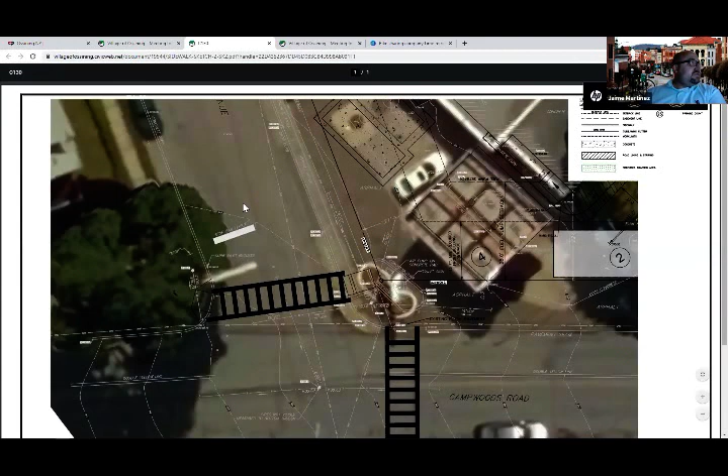So it's an L-shaped crosswalk that ends not too far from where the mailbox is on the opposite side of Campwoods — I'm probably not describing that very well. I'm going to pull it up and it'll make a little more sense. So, not that one.

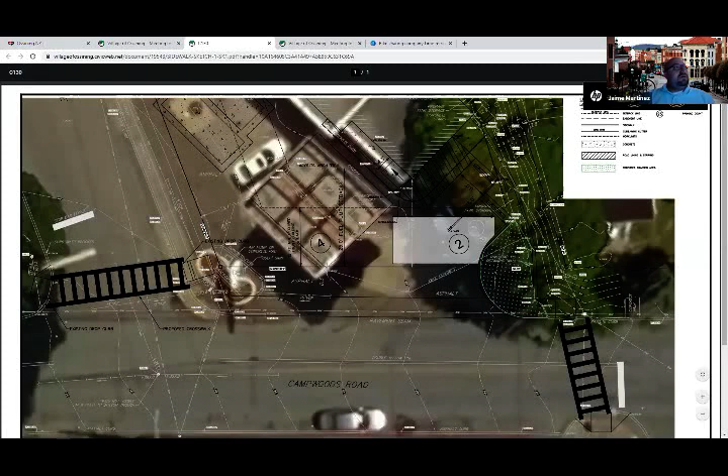Jaime, would there be any way that I could share my screen? Yeah. There we go, go ahead. Sure.

So this is what the idea was. Right, that looks right. Yes, I think we all like this. And after the board meeting, I ran this by Paul Fraioli just to get his blessing, and he was comfortable with this layout also. That's great.

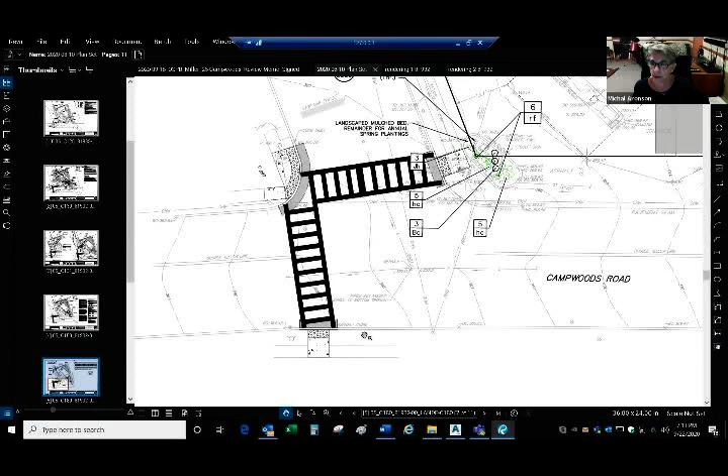Are there any other outstanding items that board members wanted addressed? I don't think so, but I just want to confirm we aren't leaving anything else out that we were concerned about. I just want to say thank you for those additional renderings that show the building with the canopy. That's it, I appreciate it.

Is there anybody from the public here to speak on this, Jaime? Let me check. There is no one from the public, and if you give me a second, I will check my emails.

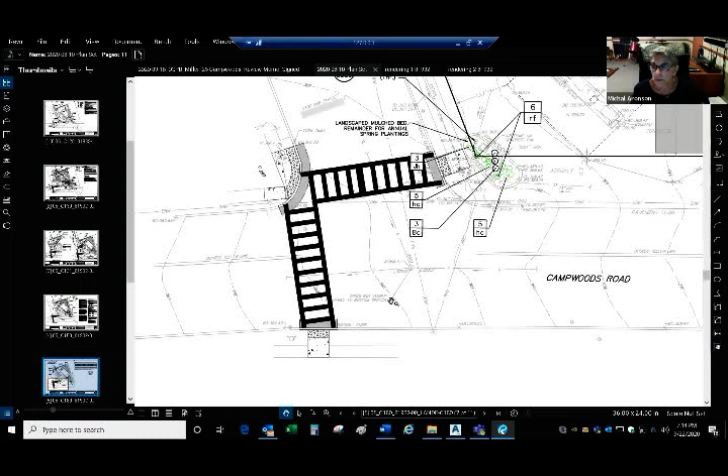You want to turn off the share function? Kyle? Yeah, there are no comments via email either.

Okay, so given what Brian had said, what are our options here in terms of board approvals? I believe it would be acceptable, but you also have to do BAR here. For the site plan approval, you'd need a condition that they complete a license agreement satisfactory to Corp Counsel. The Kellard Sessions memo says improvements in the right-of-way will be coordinated to the satisfaction of the village engineer.

I believe there was a change to the plans needed about the ADA parking space. It was almost a typo, one number had a change, but I think these can all be conditional. So you can.

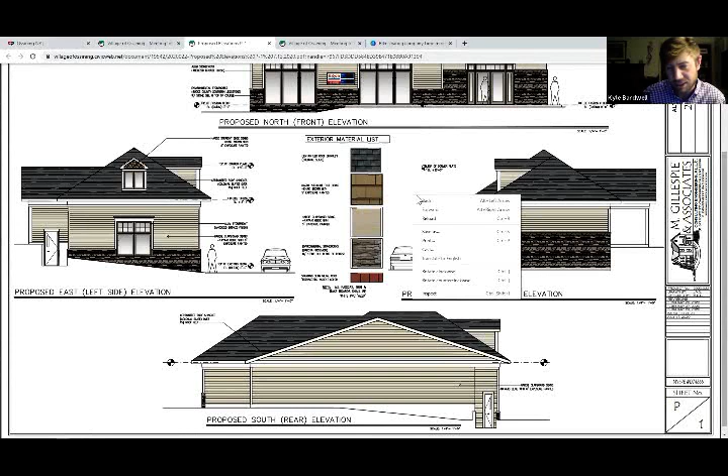So we tried to give basically HD photos from what the supplier would do. In the middle of the screen is basically all the products that we're supplying, and you can see them on the elevations, and they should be called out as such. Yeah, they are right here.

I'll read them off. There's the CertainTeed roof shingles, which are colonial slate. There's Hardie straight edge siding, khaki brown with 5-inch exposure, painted. There's Hardie clapboard siding using Navajo beige with a 5-inch exposure, painted. And then there'll be Environmental Stoneworks Dakota Pro Stack stone sill, with the stone sill at the top of the course.

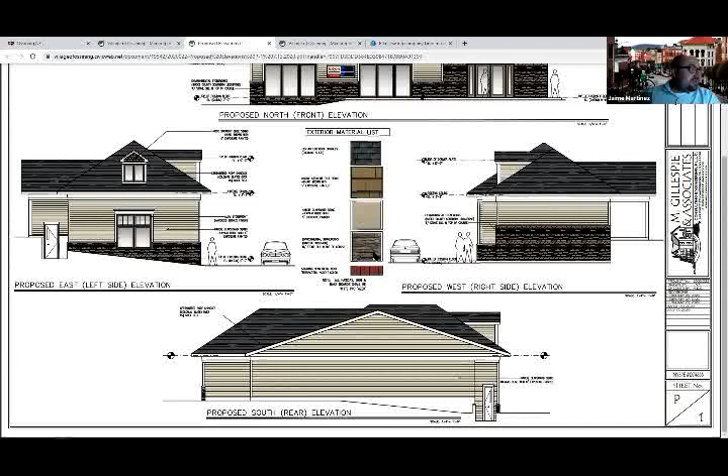Jaime presents it better anyway, so I'll let him. And there's a standing seam metal roof with terracotta accent color in front of the building. So right here, that's the terracotta roof.

Again, here's that little stone. At the top of the stone, there'll be a sill, like a stone sill. The Navajo beige right here, and then the Hardie straight edge siding up here at the top by these little window gables, and of course the roof shingles. So.

I know we talked about lighting on the site, and they were going to keep the lighting sort of low, downward washing. Any kind of lighting on the building? I don't see any fixtures there, unless I'm missing it.

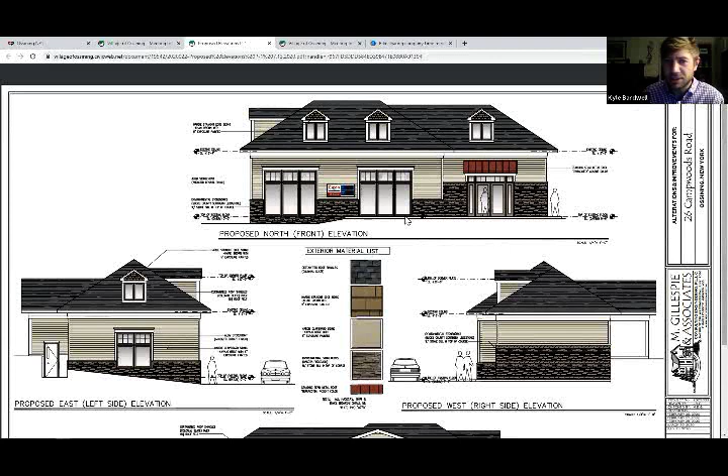Yeah, normally we engineer a photometric plan, and sometimes it doesn't jive with the architectural. So we did provide a photometric plan with our lighting fixtures as well. That's on sheet 190, and they're an architectural-style sconce light, so I can share my screen if you would like, Jaime.

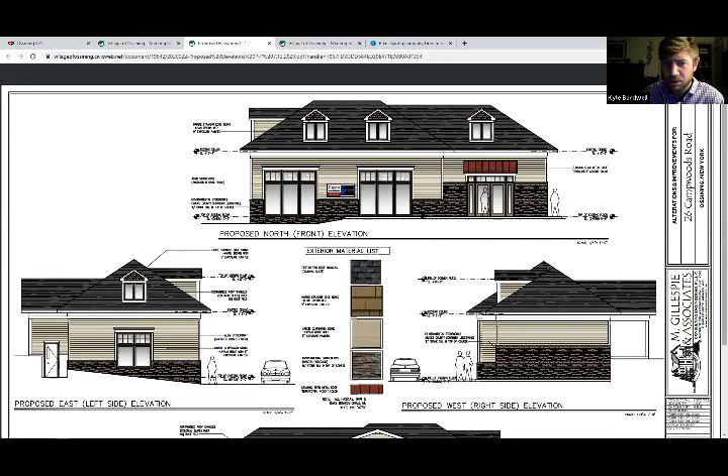To show you what that fixture would look like. Yeah, you can go ahead. Let me stop sharing. You want to share? Okay. So this is a look at the wall-mounted light. It's about 2 feet wide, 1.5 feet in height. It's architectural. It's nice.

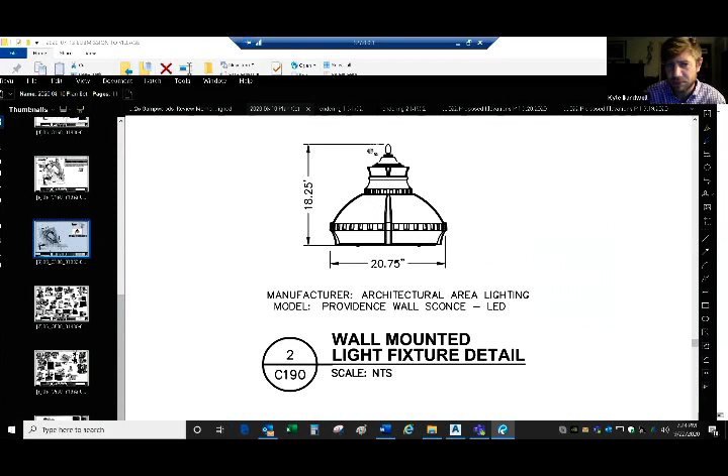And so we're proposing, I'll show you exactly where we're proposing one in the building as well. There'll be one in the front here, one on the side, one in the front here, and one on the side. This would be to best light up these parking spaces on both sides of the property, as well as making sure not to put any light over the property line.

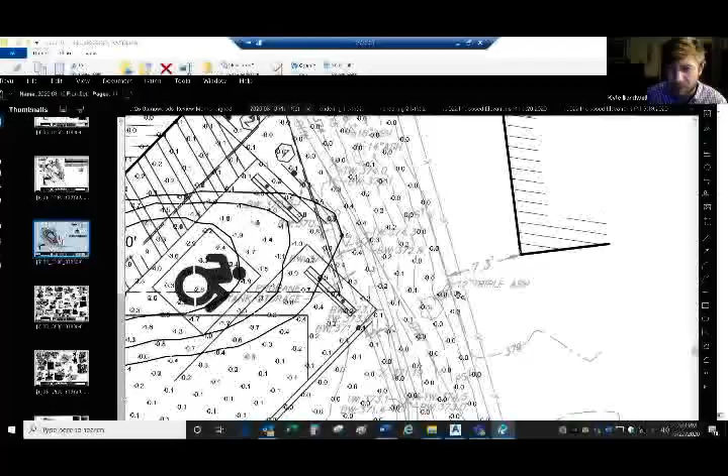So that's kind of why we went with these wall-mounted fixtures, aiming down. Is there a bollard light in the original plan? I remember maybe on the north side. Yeah.

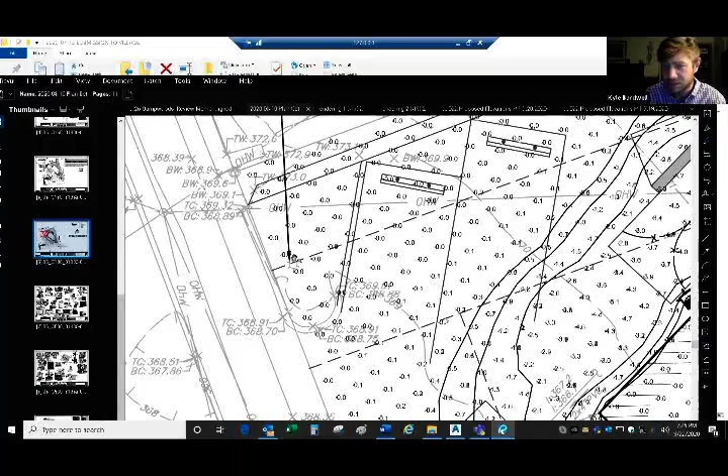Right, so there's one existing kind of bollard light. I think it's like a tall bollard that's existing out there. So we're just going to keep that in place, and that'll help light up this corner of the property without adding more light over there. Basically, the idea is we just put it over here to kind of light up the refuse and small part of this parking, and then this would be sufficient to light up the remaining parking area over here, as it does in kind of the existing condition.

So these are 4 proposed lights on the site. And then the lighting underneath the canopy for the fuel tanks, is that just the standard whatever's there now, or something different? That's correct. Yeah, so there's no changes to the canopy other than we're just changing the logo with the supply. Okay, the gas. So.

Okay, are you making sure that the canopy light also stays within the property line and not going out to the neighbors?

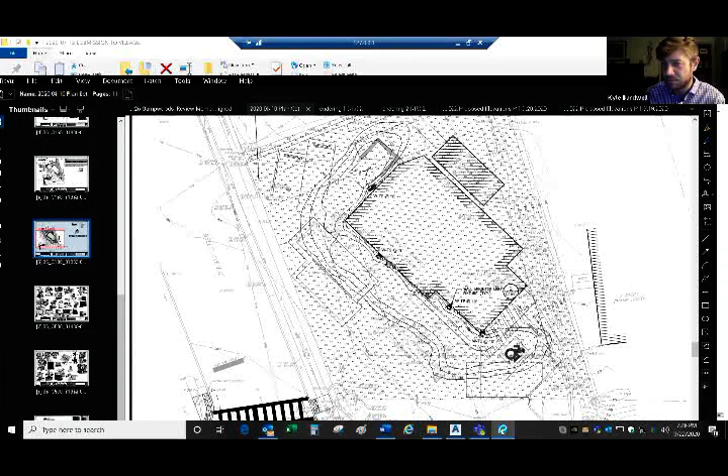So, kind of in line with what I was just saying, the canopy, we're actually not proposing any changes to the lighting, to the height of it, to the size of it. So we're understanding that it would basically fit the lighting that's out there right now, and I'm not aware of any concerns with it being too light at any point in the day. But we did, when we did our proposed 4 lights here, we did take a good look at making sure there was no spillover of light, and we're aiming our fixtures down and such to prevent that.

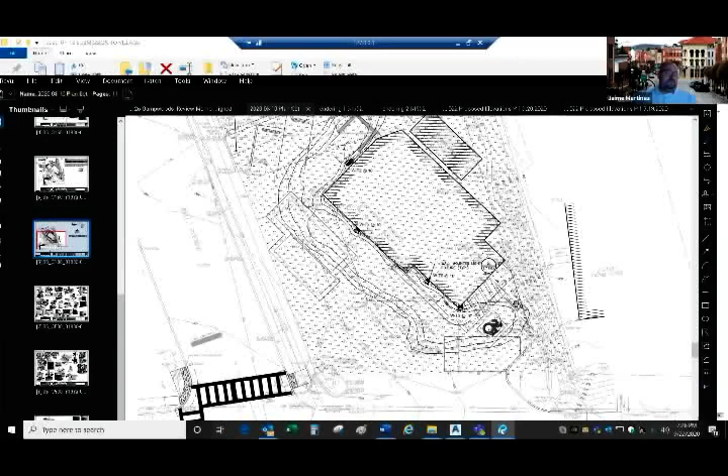I'm just trying to figure out from the elevations here, the standing seam metal roof, does that project out from the building, the one over the main door? So, let's see.

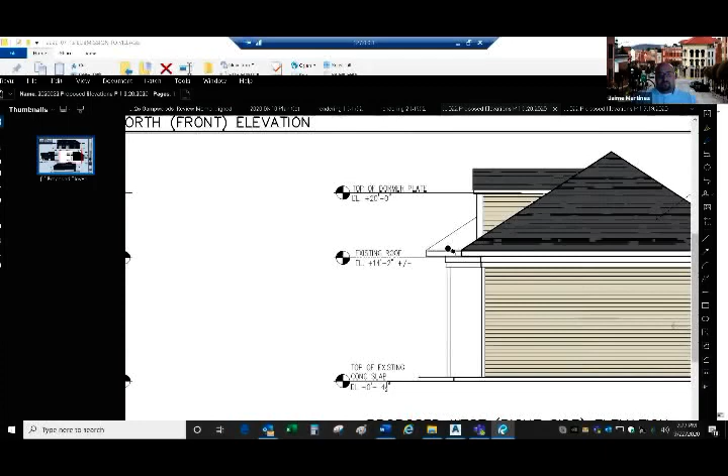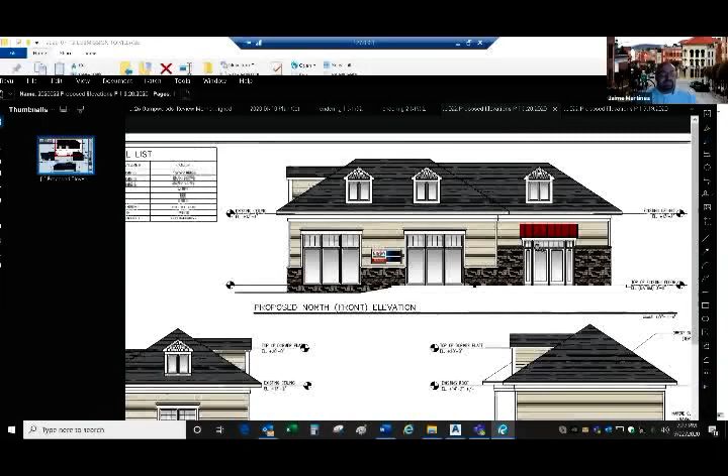I believe it would. Let me take a look at it here. This is, I believe, that roof you're discussing. Looking at my screen right now, is this what you're talking about, or is this the red roof? The red roof, like the terrace. Does that project out from the building above the door there?

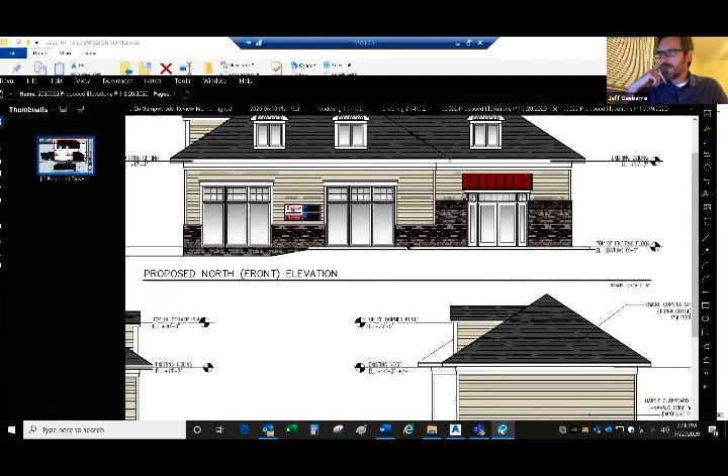I believe it does. I would have to follow up with the architect just to confirm the distance and exactly how much it does bump out. But I assume it would probably be a couple feet out, just because of the way it appears on those new renderings you did. And I know those are not always architecturally precise, but it shows it as sort of flat there.

Right, that's a good point. So yeah, I would have to follow up with the architect on that, Jeff, to see if it comes out a little bit. But I assume it does. I think that was just a mistake in the rendering creation.

Yeah, I think we're gonna need to be accurate with the elements, because that's basically what the department's going to have to review and enforce when it comes to building permit, CO, that sort of thing.

Sure. Yeah, we were hoping the renderings would kind of just give an idea of what it would look like in this area of the neighborhood, a little better look at the overall structure of it. But the architect is definitely more accurate and precise when it comes to colors and design.

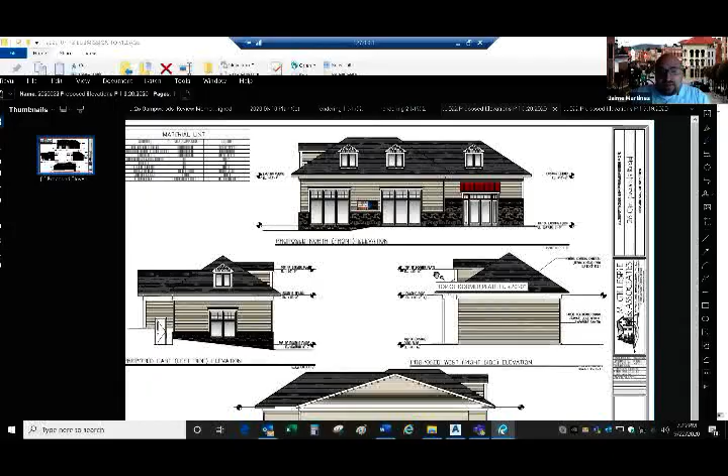Any other questions from the board? Just real quick, I guess the question I would have for you, Jeff, and the whole board is, if it's not flat and it does project, do you want to sort of set an expectation now, or is this the kind of issue we would ask them to come back for?

Yeah, it seems that, first of all, it's also labeled roof, so I think it should project unless there's some sort of reason, because of clearance, that it can't. I think it actually looks very nice. I think it adds to it, it's a nice feature that draws your eye to the entrance.

So I don't know, that's the only thing that sort of stands out to me, but I don't know if there's a way we can move it forward without having certainty as to that.

Is there an architectural plan in the set that would show that entrance door? No, this is actually the only sheet we have for elevation. That's all we got. And yeah, I'm under the assumption that it does project, but I can't be certain, to be honest with you guys.

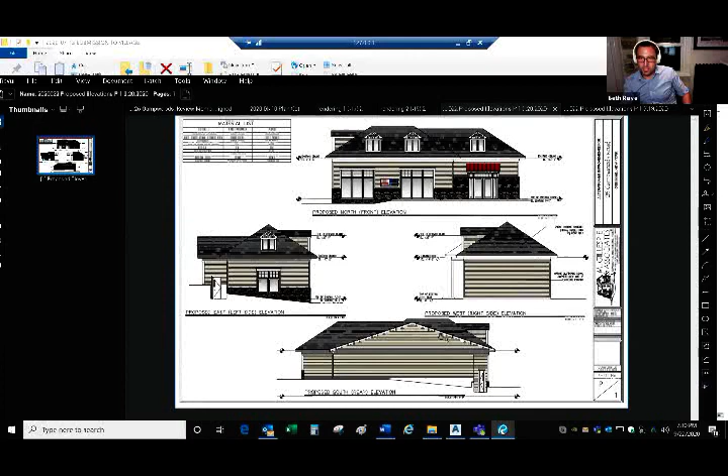So it's a roof, it should show on that west elevation. We should see it kind of in that white rectangle there, jutting out in that space. Yeah, where your cursor is. Yeah, that's what I was wondering. Not up there, it's actually lower, because it's below that fascia there.

Yeah, okay, so then as far as I'm looking at it, we're not showing it there. So what are our options here?

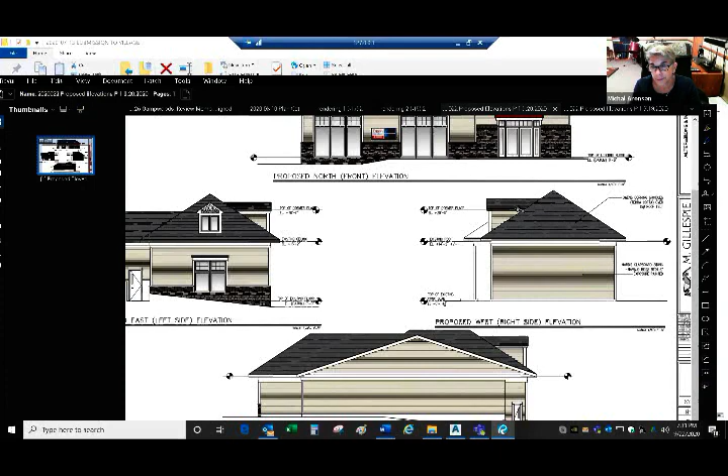Well, it depends, I guess. Is this kind of a material issue for the board? Do you feel that you want... How do the other members feel?

I think the design intent is clear on the north elevation that this is some sort of a bay entrance that projects out, and it's got a sloped roof. I just wish it was clear on the other drawings. Right.

I would keep in mind that there's still work to be done on this application to get an approval by the village. That's not going to take place until October. Even if they did get that, it would allow them to start work, but wouldn't necessarily, if this decision did get made till October, I don't know that would materially affect the project. They have one approval today.

So if you are concerned about this, I have a little bit of concern too, because I'm curious how this is going to get handled by the building department when it comes in, because they may look at this and say, I'm not really sure what's correct here.

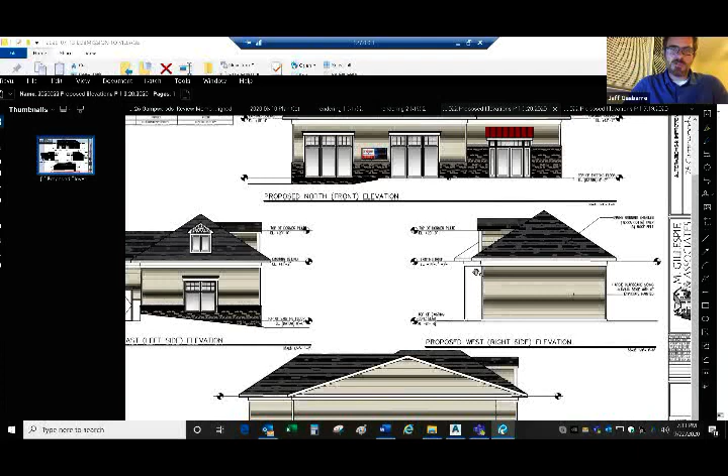It seems like it might make more sense to just hold off, in as much as it's not going to hold it back, and it would allow the applicant the opportunity to bring the architect here and better refine or explain what's going on, if that's necessary. It's just a clarification on this one element, because I feel pretty comfortable with everything else from a BAR perspective. If the rest of the board feels the same way, maybe we can get clarification next meeting.

I'll get a little more detail for you guys next time. Apologize about that. A suggestion - if the architect were here tonight, he probably could have given us a sense of comfort, and we might have been able to move ahead.

You basically have approval, so you can move ahead with the site plan, and you'll be back in October for basically this one little review of this one extended roof. So we could probably do BAR next month. Like Jeff said, this is really the only issue I think with the overall elevations.

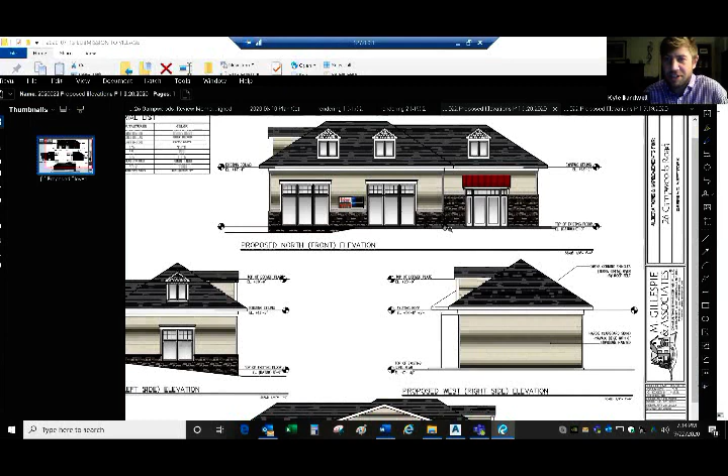I understand completely. I just didn't want to say something with utter certainty that I'm not certain about. I think that's the right decision usually - it's a smart move there. The first thing I'll do tomorrow is talk to the architect and figure out exactly what's going on with that front entrance, and I'll get that back over to the board.

So then Michael, you would just move to adjourn the BAR application, or take a motion to adjourn. Could somebody put forth a motion to adjourn the BAR to October? This is Jeff. Motion. Oh, Seth, you have it? Seth Roy, motion to adjourn to October just to deal with the entrance design.

Jeff, I second. Okay, and the roll call: Michael Aronson - aye. Mike Baldati - aye. Jeff Gasparo - aye. David Chow - aye. Alberto Fernandez - aye. Did I say Seth Roy already? I don't think so - aye. And Eric Talbot - aye. All right, that was 7 in favor, none against.

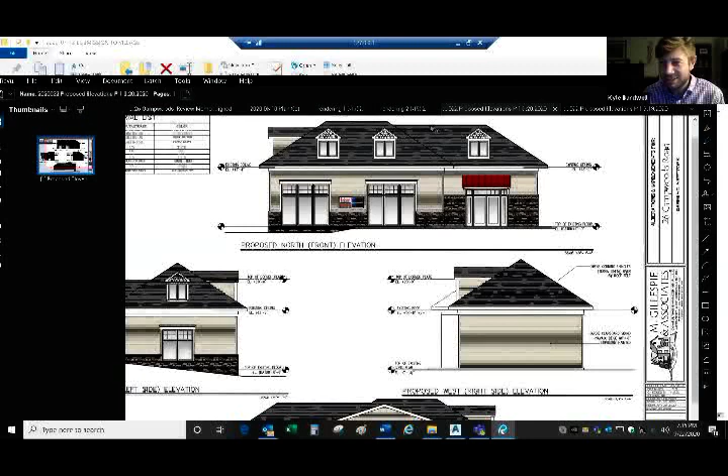So we've got PB 07-2020, which is 8 and 12 Liberty Street. The applicant is seeking a side yard lot line adjustment between the two properties. We have Doug Turshen here.

Hi. Can you guys hear me? Do you want to pull up what would be most helpful? I'm going to pull up the survey - I think that's probably the most useful at this time.

Maybe Amanda or Jaime could just give us a couple background points on what we're doing tonight. So let me start - a few years ago, Mr. Turshen came forward to get basically a lot line adjustment. He had split the parcel into two, or subdivided the parcel, and then he built a new accessory structure in the back - here's the accessory structure.

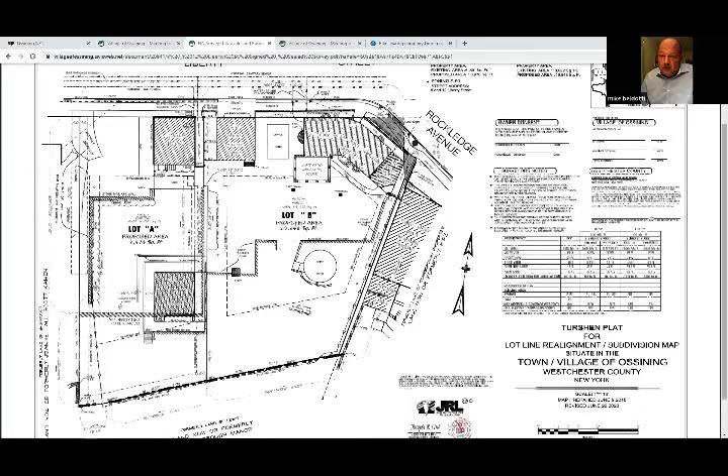There are existing non-conforming lots, and they continue to be non-conforming. This is an S50 zone, which is the smallest residential zone we have in the village, 5,000 square feet. What are the two lots in terms of square footage? The square footage is, so here, I'm going to try to zoom in on this table. It's right here, and I'll give you all the details. The size is not really the issue, I don't think. It's the front yard setback that's the issue.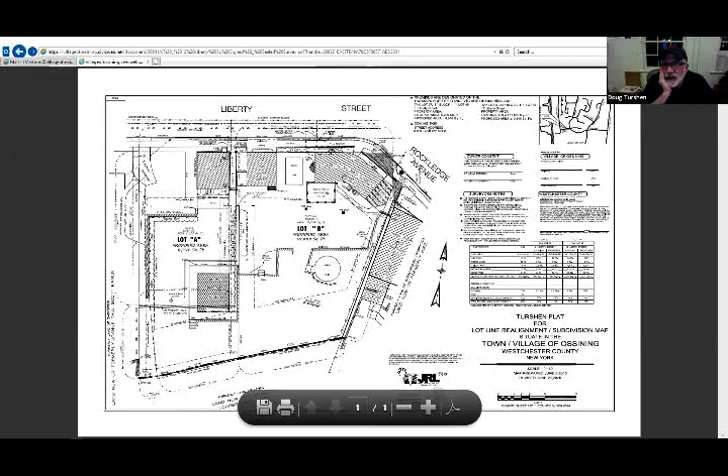Is there anything about looking at the permission that we got in 2015? Basically this was just a lapsed thing, but then we did have to move the line slightly, it's the same thing. I think it's not changing much. Right, it's just, I mean, I feel like it's an important question for the board to ask. It's not clear to me from looking at the minutes of the last 2015 meeting that anybody, you know.

So the lot area, they both are fine on lot area. As you can see, the proposed is increasing one and decreasing the other. The lot width is 50 feet, and they both are conforming to that. The front yard setback is 30 feet, and both of them have a 0-foot setback. That obviously is not changing. The one side yard setback is 8 feet, and they both are staying at less than 8 feet, but they're not changing from the amount of the side yards.

And then the combined side yard for each is staying at what it is, both larger than they need to be. The rear yard setbacks are all fine. The livable floor area is fine. The building height is fine. The max impervious surface is fine, and the max building coverage is fine. So again, I'm not the building inspector, I can't be the official arbiter of such things, but as far as I can tell, they're not increasing any of their nonconformity.

Right, they do remain nonconforming on the front yard, but otherwise they conform. Yeah, I'm sure, I appreciate you going through that for the board, Amanda, and I bet that Joe would have flagged it for us if it were an issue. But it's good to have on the record.

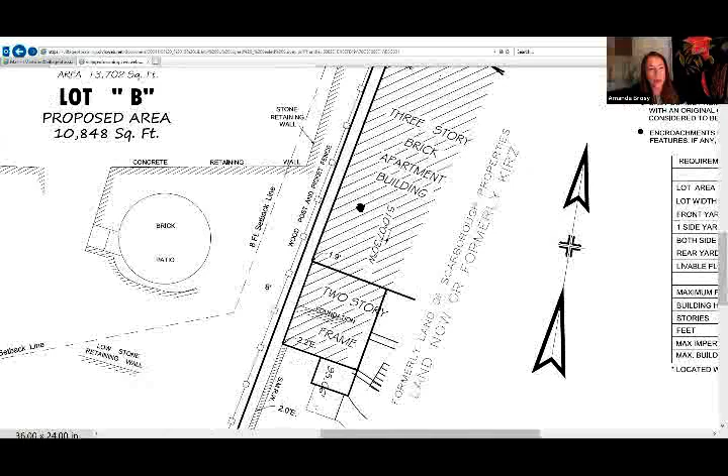And there are no easements that are required here, Mr. Turshen, correct? I don't believe so. Okay, because if there were, that would be a condition of the approval. So really just the one condition that would be necessary is the health department approval.

Can I ask a question? What do I do to get that? I believe it's just a submittal to the health department to ensure that the plat is conforming with all their requirements. I think it's really just an administrative review on their part. So who do I get in touch with? I don't know off the top of my head. County Health Department, the Westchester County Health Department.

Yeah, that helps. And is that the list? I thought you meant like a particular person. I don't know who in particular, but the county health department, yes. Okay, so when they say I have to file this with the county, is that it, or is there another thing? Well, you do need to file with the county, and you need to make sure the village has sets on their files, but we don't need to make those conditional of the approval. Those are just code requirements, making sure the building department has certain copies on file.

Okay, I mean this all came up in trying to close out the building permit. So there's all those sign-offs and everything. Right, but I appreciate it. Thank you.

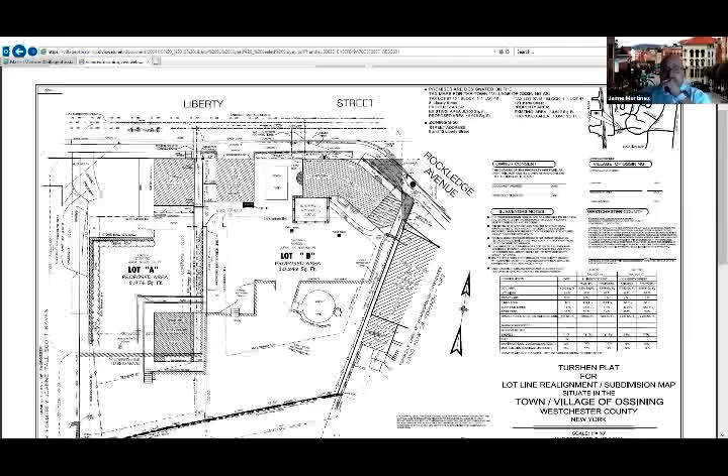So then do we need a motion to waive the preliminary review, or can we combine that into one motion, waiving the preliminary review and going for final review, but with conditional health department approval? I would say it's probably fine to do it in one. Okay, anybody want to make that motion?

Mike Baldati, I will make that motion. Second. Seth Roy, I'll second.

Okay, roll call: Michael Aronson, aye. Mike Baldati, aye. Jeff Gasparo, aye. David Chow, aye. Alberto Fernandez, aye. Seth Roy, aye. And Eric Talbot, aye. Okay, the motion carries 7-0.

So should we move on, or? I think this one's good. Yep, great. Thank you very much. Thank you.

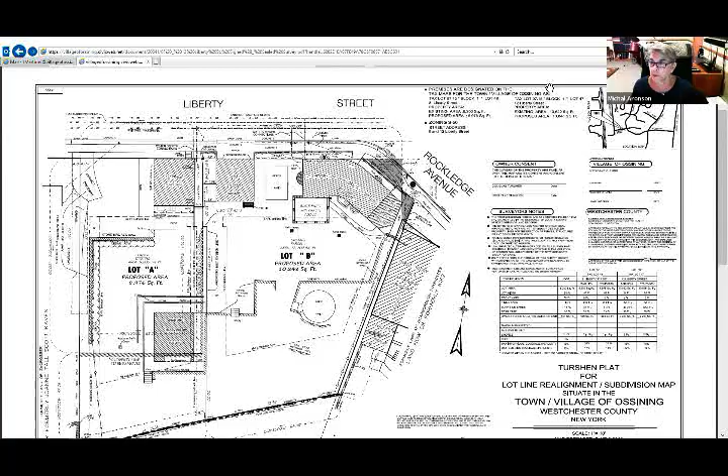So now we have BAR 09-2020, which is 104 Revolutionary Road. Applicants are seeking BAR approval for a proposed rear yard addition.

We have Dan Slavin here, and Dan, is there anybody else here with you? Hello, can you hear me? How's it going? Jim Coleman, all right. We have Jim Coleman here. He should be here. Can you hear us? Yes, great. Hello, it's Jim Coleman, I'm here with the owners. I don't know why my video is not... oh, here we go, sorry. Oh, there you are, okay. Hello to the board, should we just go ahead and get started?

Yeah, so I'll just go right to the images here. So this is the existing house, it's a Tudor. This is the site plan. So the house is right here, surrounded by trees. Let me zoom in.

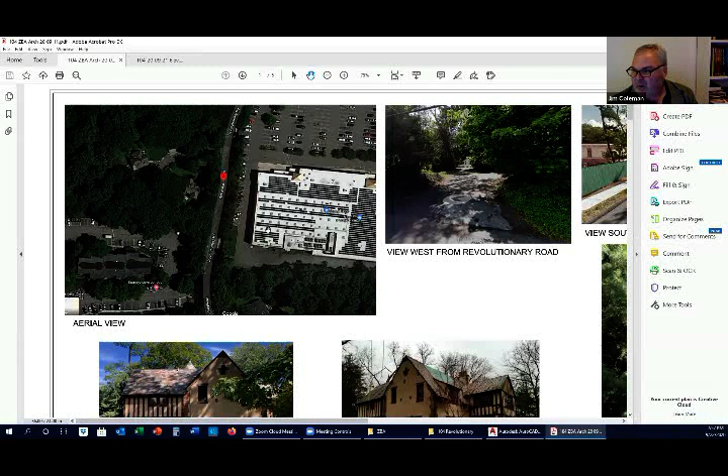So this is a neighbor. It's very private, this is a private road. It's really a drive, just serves these two houses, and then there's a house up here. This is the Stop and Shop and the mall across the road. This is a view looking up that drive. This is a view to the south, and a view to the north. So you can see that the property is very well screened.

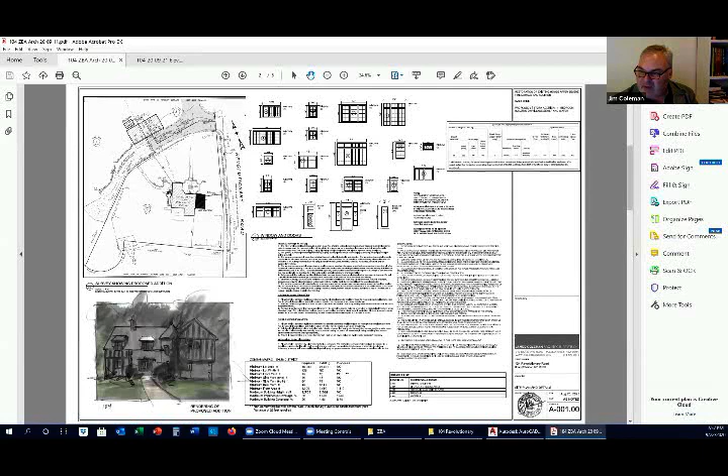This is the area where we're proposing an addition. Right in here is where we're proposing an addition. So let me just go to the survey. It's a little bit of an unusual site, it's a non-conforming site.

This really feels like the side yard on the site, but is technically the front yard because this is Revolutionary Road and this is a private road. So we are also getting a referral to the ZBA for a front yard setback variance.

And we're proposing an addition right here with Tudor detailing to match the massing, matching the dormers, and then details of the trim. This is the existing house. It's a small building, there is no first floor powder room or bedroom, so that's what we're proposing right here.

It's 12 feet wide. And then at the second floor, there were very small closets from the 20s, long before Amazon. So we're proposing a new master bath and closet at the second floor that's tucked in under the roof. So these are both dormers to maintain the massing.

Here are the elevations. So this is the existing house here, this is the front, this is the addition, this is the addition on the side. We're just extending this roof line out. This is the back. And then this is the side of the house, this is the massing that obscures the addition.

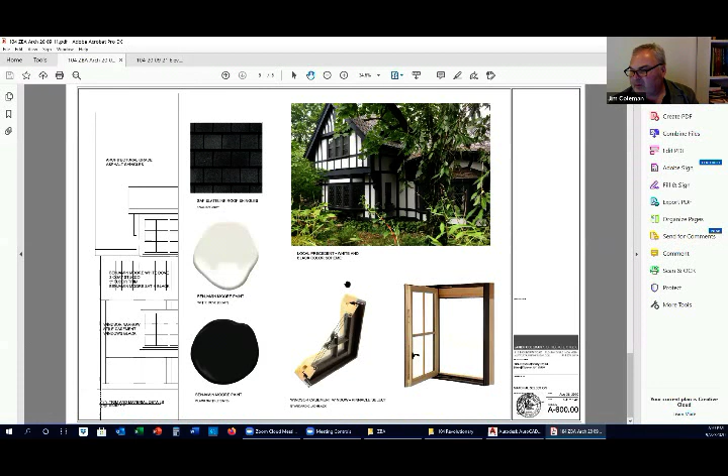So that's really the project. Happy to take questions.

A quick question - there's no access to the property from Revolutionary Road, even though you said that part of the house is considered the front yard? Correct. This is all trees, and then this is a private road, and this is a shared garage shared by this house and the Slavins. Oh, this is known as Wilson Lane. But you're correct, there's actually only pedestrian access to the property.

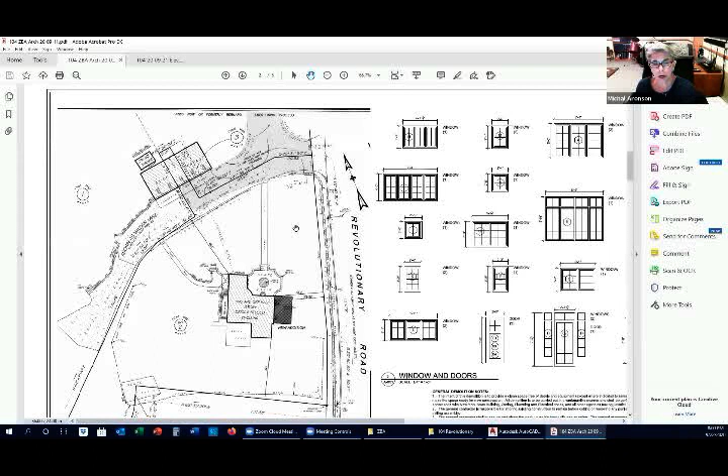No driveway. Okay. And so is the entire facade being redone with new stucco, or is it being painted plus the addition? Just repair and painting. The fire damaged the roof significantly, so we have to replace the entire roof. We're replacing windows, but the actual exterior walls are in good condition.

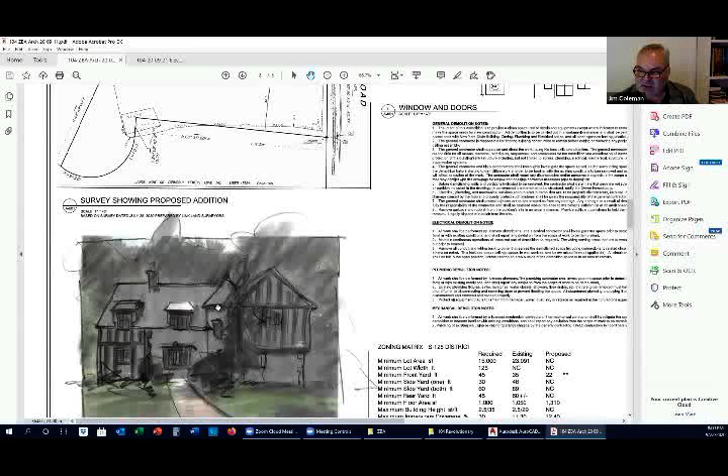Do you have any images of the facade that you're going to be covering over with this addition? Yes, let's see, this is right here. So we're actually going out, let me zoom in. It's a little hard to photograph because it's narrow. This is the facade right here where we're extending the roof, and these 4 openings will become the openings to the new rooms. The construction is terracotta block with a stucco finish.

So it was an easy way to make new openings in the block, just by lowering the sills. Yeah. And this is that same side here.

And what's the visibility of that wall from Revolutionary Road? I know that's not technically the front of the building, but can you see that? It looks like there's maybe some screening from those trees. But yeah, no, you really can't see it. This is where the house is, right behind here. So it's raised up, and then there's heavy foliage, both evergreens and deciduous trees.

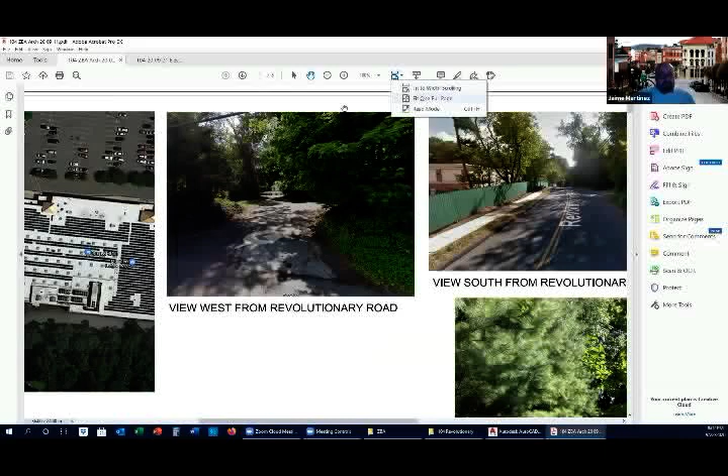Is there a little gate in that stone wall? I thought I saw maybe something on the plan that there's maybe once like an entrance from there. You know what, let me check. I could be wrong. No, you know what, those are dimensions. So there's no break in the wall. Here's the wall right here, and these are...

Are you gonna remove any trees or shrubs there? Will it still be screened if you have to remove any plant matter? We're not intending to. Dan or Bell, you weren't planning to take any of these trees out, right? No, we're not. And I just wanted to comment when you asked if it could be seen - I think the comments we've had living there 22 years have generally been, we didn't even know there was a house there. So I think the conclusion is that a lot of people don't - if you stop and look through the trees, you'll see our house, but if you're driving by, most people don't know we exist.

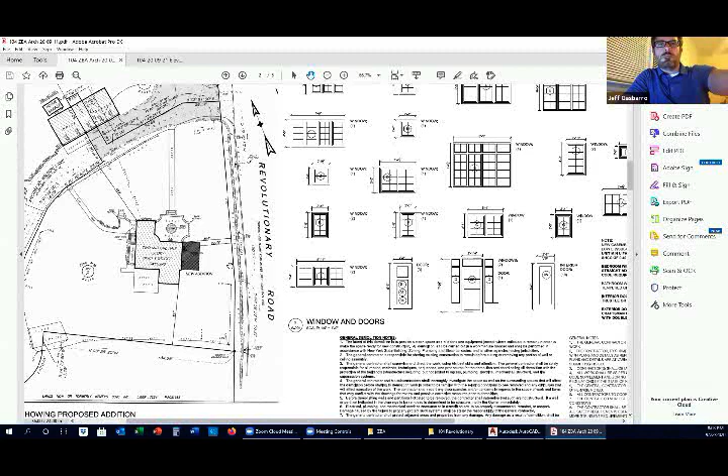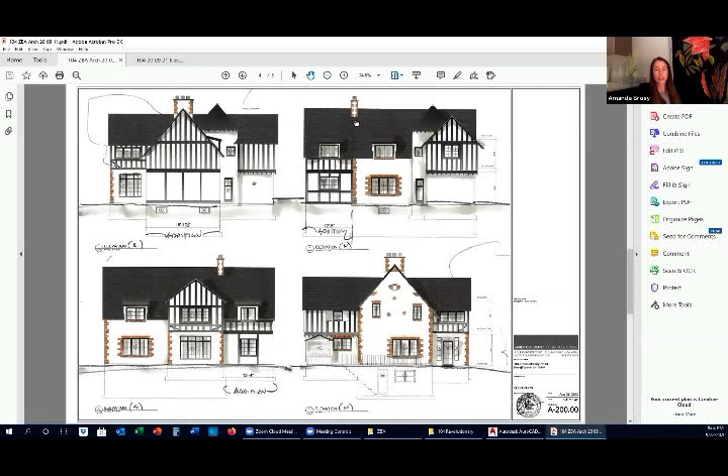Amanda, I have a question - are we allowed to move forward with BAR approval while their front yard variance is pending? Yeah, that's something I was going to address. It's not the typical way of doing things - ideally they would go to the ZBA first and then come to you. But there is a bit of expediency involved, maybe that's not the right word, but because there's been a fire here, I think it makes sense to do things a little differently and make your approval subject to them receiving an area variance from the ZBA. Although it's not typical, I think it's acceptable for you to move forward with that condition.

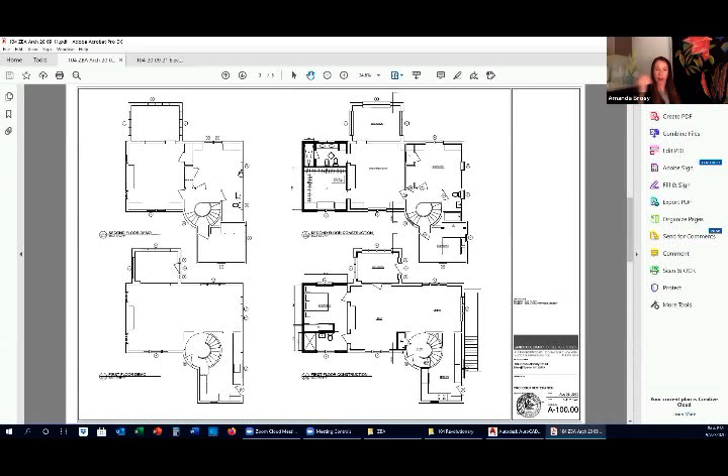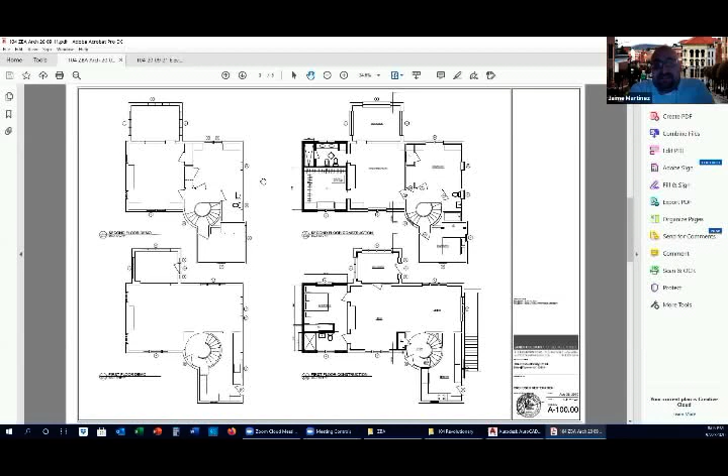And I would note that the area variance they're asking for is a front yard variance, but it's not a particularly major variance. And again, the applicant is not even able to live in the house currently because of the fire. That's correct. So the process of this application has to terminate prior to them being able to start construction and move back into their home, so time is of the essence.

All right, yeah, that's all right. Do any other board members, before I open it up to the public, have any other questions about this?

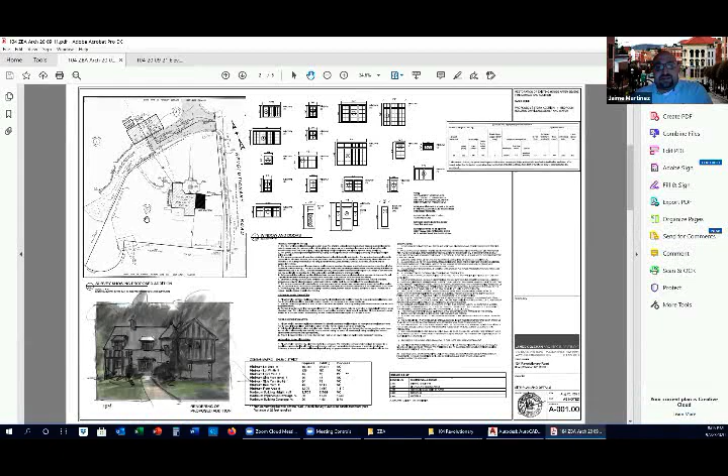Okay, great. Jaime, is there anybody from the public that wants to speak about this item? Yeah, Jim, can you stop sharing your screen real quick? We do have somebody raising their hand.